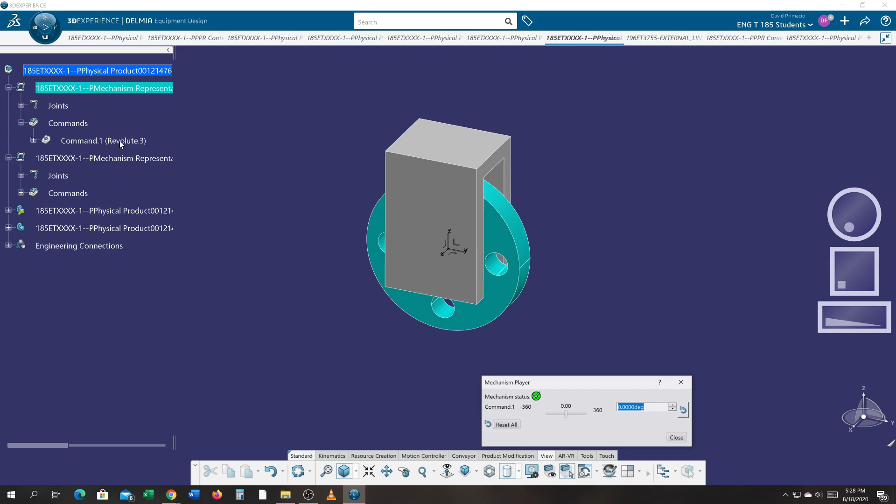I don't know what's wrong with my system now. It was working this whole time. You see my wheel spinning there? I'm verifying that it actually works. But for some reason, when I hit play, it's not letting me play. It's like not even going into the player.

This was a prismatic motor, so that part would move back and forth. I hit play and it should be moving. It's not going into the player down below. Oh, because I'm in Delmia equipment.

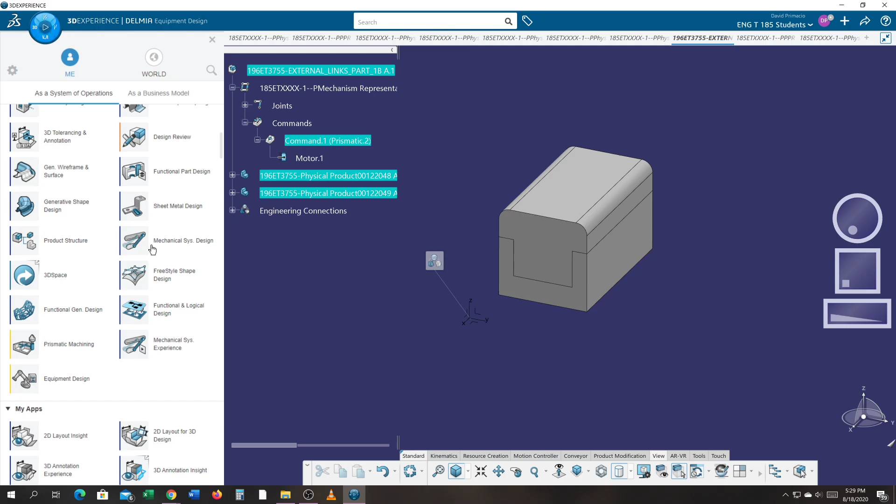I have to go to mechanical system design. And we'll hit play now. So there's a prismatic move.

I didn't put any limits on this because the parts we have in class literally just come apart. So I could just slide this thing where it comes all the way off. Exit will take me back. I can hit play. That's the compass up in the top, the play button.

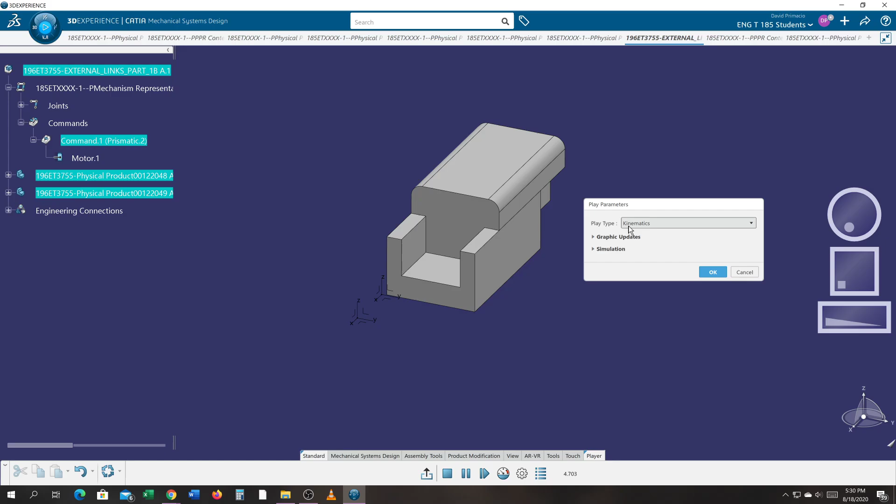I have a settings here. I'm doing the kinematics, and I can increase the frames, and it'll kick it up a little faster, so you can see the part coming apart here.

Let's see. See if I get this one to work. So I got that wheel you made. We're gonna make a kinematic for this so it can spin like that.

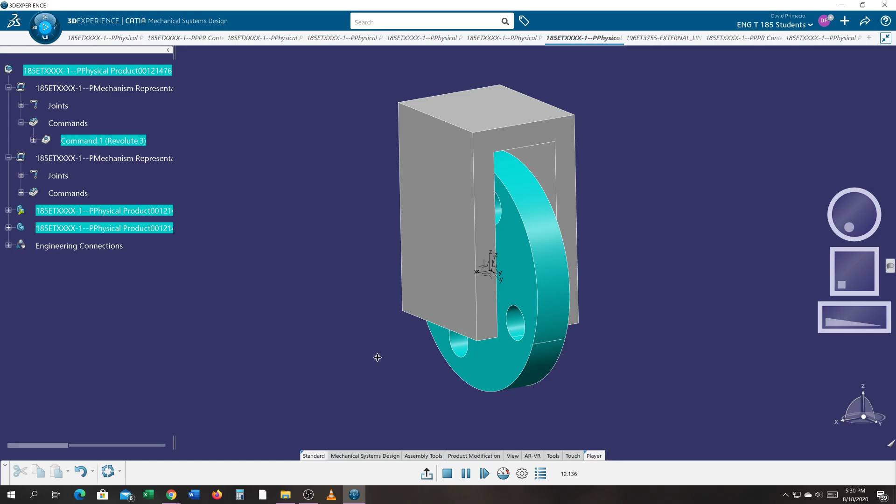There's only a few steps to make it happen, but memorizing the few steps that make it happen drive me crazy. It's nothing like it was before.

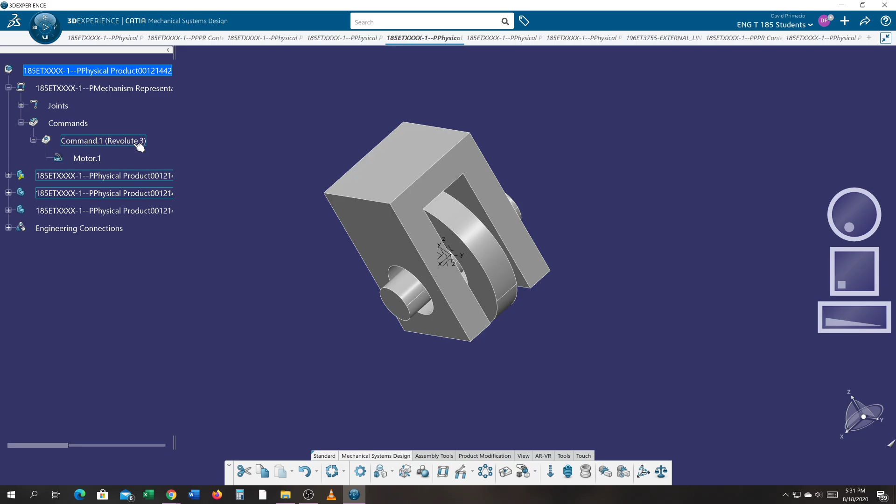So I've been trying this a few times to make sure I can get it to work, but the last time I tried to get it to work, all of a sudden I couldn't get it working right.

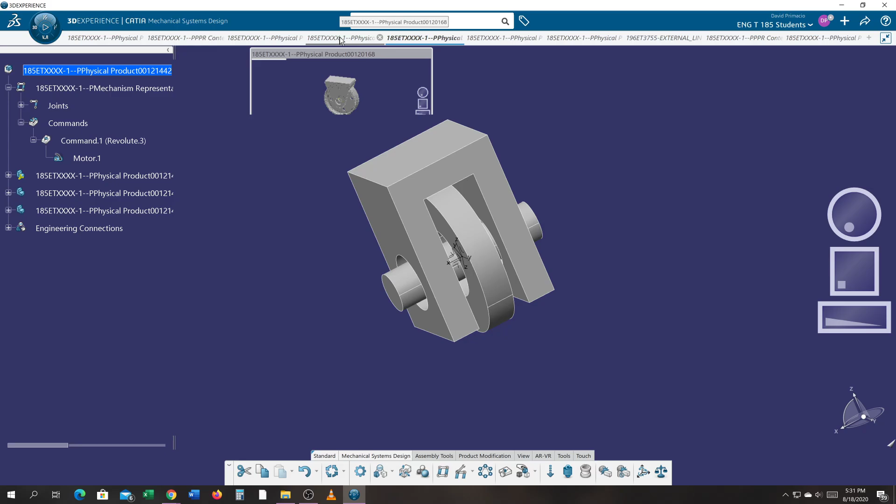See if I have that example. That one, that one. Alright, I'm going to try and run through this step by step.

The two workbenches we're going to use is equipment design and mechanical systems. I don't know why they made this so difficult, but don't confuse this mechanical system design with a mechanical system experience. You want to be in mechanical systems, and what we do is we lock up all our degrees of freedom in the mechanical systems, and the equipment design is where we actually define the motion.

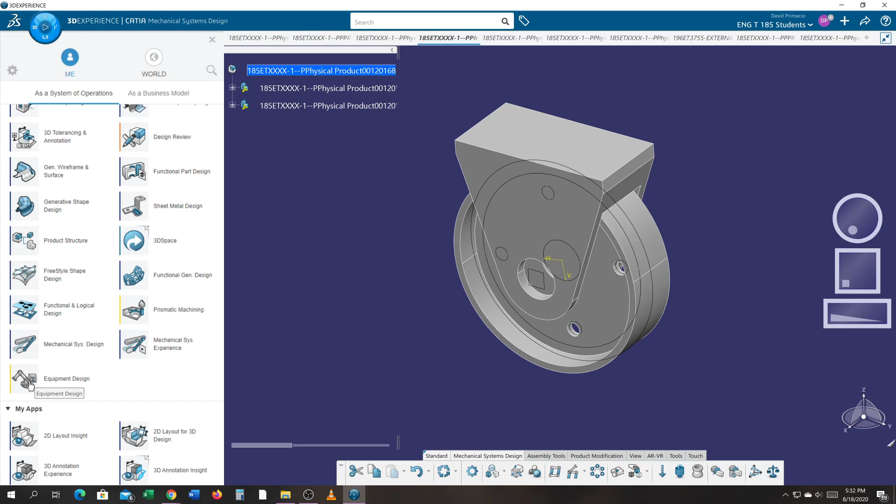So I'm going to go to mechanical systems design. Oh shoot, I was already in there. I saw another model in here I don't need.

Alright, I'm going to go ahead and give this a shot. I'm in Mechanical System Design Workbench up here in the top. I'm going to go to Engineering Connections to set everything.

Now under here, I would think I would want to do my fix and grab the top piece so it won't move. But that always screws me up. I don't know what's going on in here that I don't get that to work right, so I'm just going to cancel out of that.

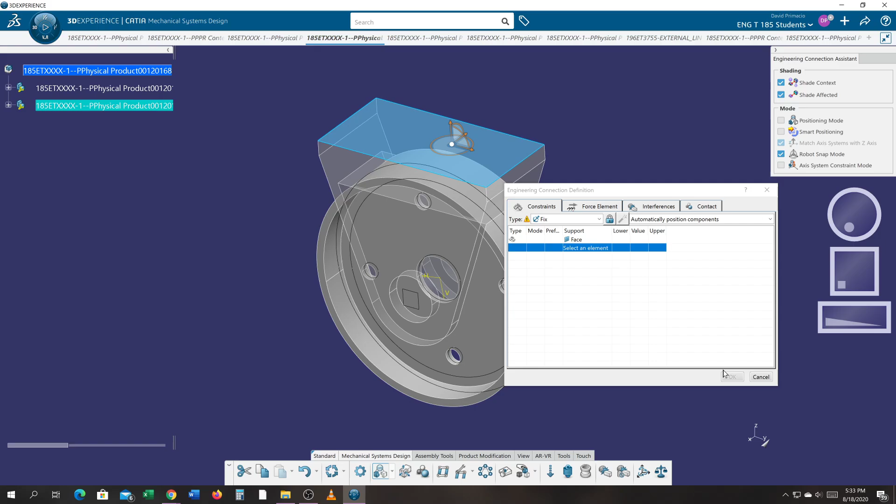Click on the top and use the anchor like we did in the assembly modes. So I'm going to go ahead and fix that.

Now the number one mistake I see people make is that face is highlighted and I go into that engineering connection and it's working on that face now, and I don't want that. So make sure to click off the part so that's not on when you go into the engineering connections.

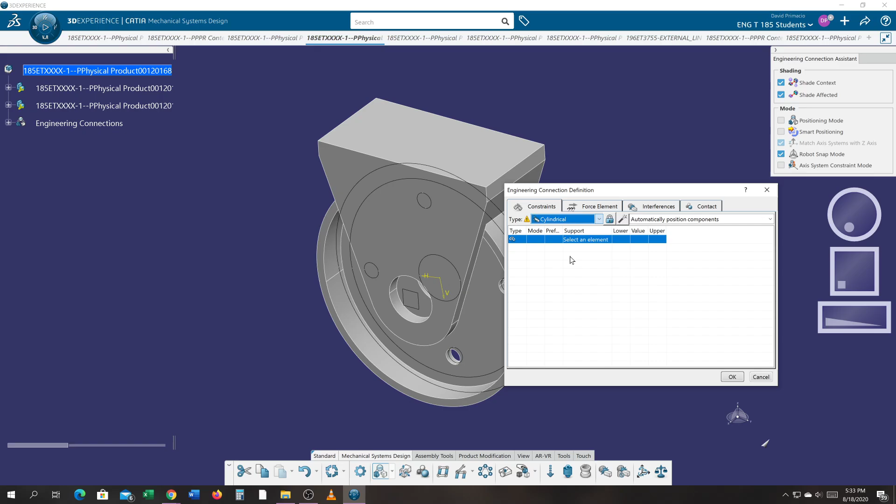In the engineering connection, I'm going to define cylinder, and order of selection might matter, but I think I've tried both and I've been having issues. So I'm going to just grab the outside cylinder of this.

It finds the center of that wheel. I'm going to grab the center of this one here, and it gives me two axes that are coincident or concentric to each other. So they share the same axis.

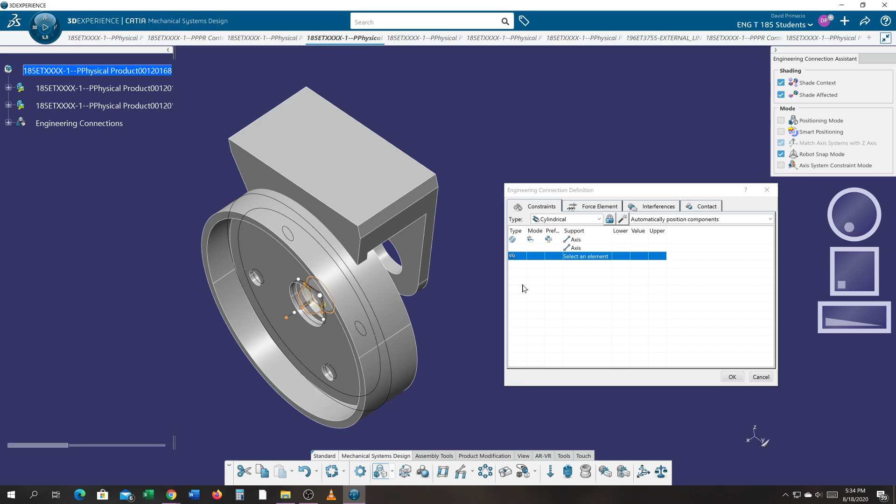Okay. Now I've never had it shift off on me like that, so I'm just going to continue on here. We'll move this over here. Oh, yep. So I got my cylinder set, and I'm going to go into

Prismatic, and I'm going to select this face and this face over here, and they touch. But I don't really want them to touch.

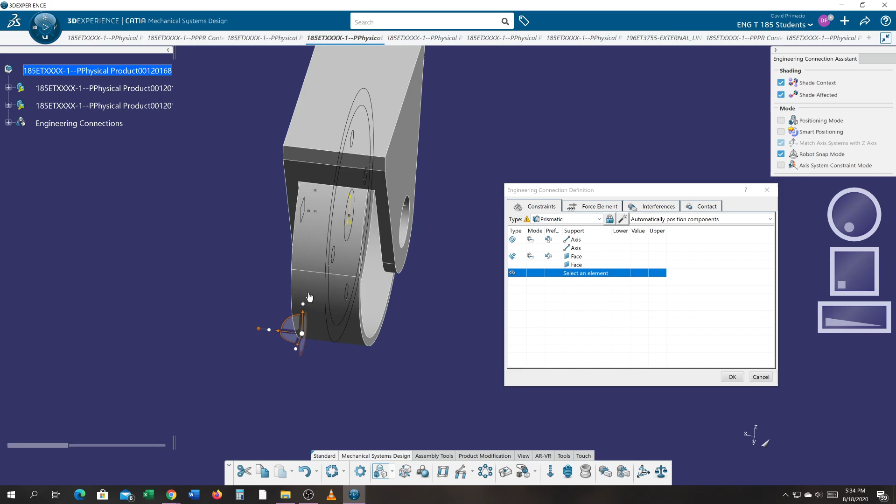Okay, so I was under Prismatic here. I just hit the undo button because I wanted to re-show that. I'm going to have to start from scratch. Remember, nothing's active. Hit this.

And the first thing you want to define is cylindrical. So I'm going to get the two holes to line up, so that's why I'm using cylindrical. I'm going to grab towards the center of this hole and towards the center of this hole, and that should line those two axes up to maintain this coincidence.

So I've got coincidence lined up. I've got coincidence on these two axes, which are the two axes for the center of the hole. The next thing I did was a prismatic.

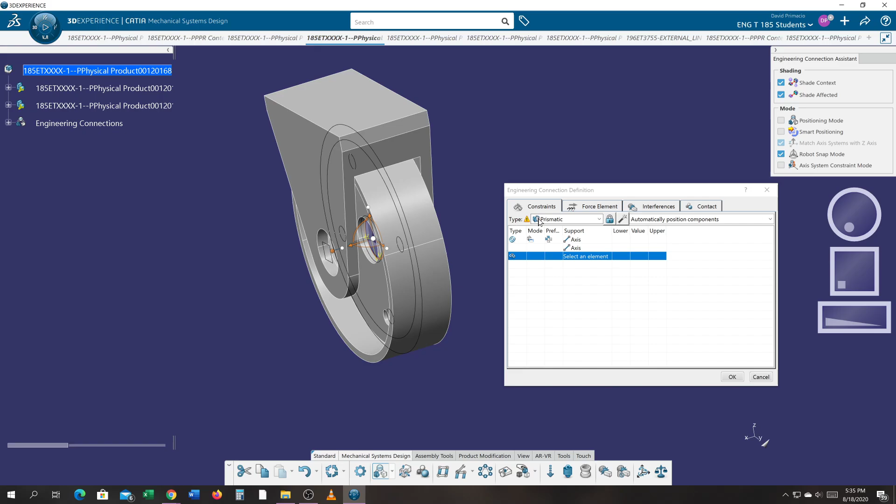Under prismatic, the type I'm doing next, I'm going to grab this face, rotate this around, and grab this face over here. For some reason it puts them so they're touching, in contact, and that's what this is doing right here. So it's got this face and this face. This blue line is waiting for a next line.

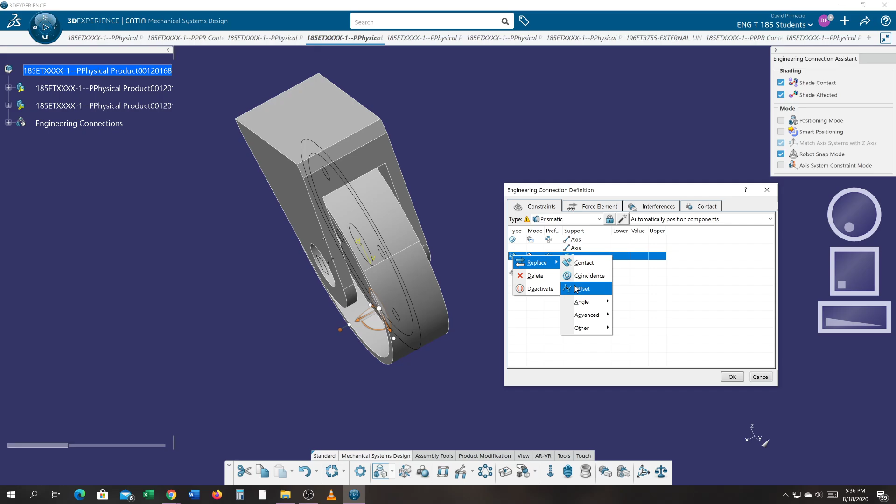I'm going to go back to the face to face I did, and on that one I'm going to right click to do a replace. I don't want to do a face to face. I want to create an offset so that wheel is centered and not touching the face.

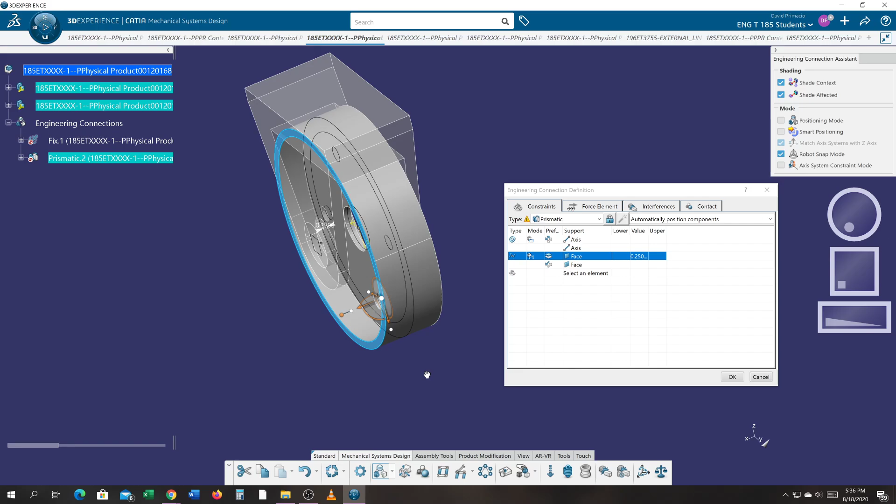Now I happen to remember, oh I guess it didn't because I kicked out. I'm going to change this to 1/4 inch because that's how I created this part to be centered, 1/4 inch gap on both sides. What I've done so far in my engineering connections in the specification tree is I've fixed

the top piece so it can't move. At least that's what I am hoping I did. And then I set up the axes so that there's a cylindrical concentricity between the holes. And then I went face to face to set the offset. Where in this wheel is it going to sit? Now what I want is that wheel to spin.

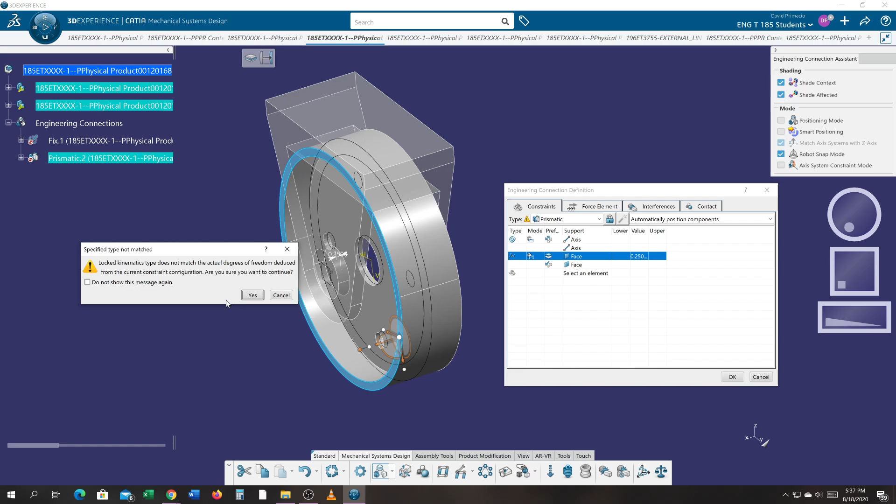This mode again, under mechanical systems, just locks everything down. I have to say okay, and just ignore this message. Yes, I'm sure I want to continue because you're making me go somewhere else to continue this. So I say yes, I'm going to continue, but I have to switch workbenches. In the old days you only stayed in one workbench, and the workbench was called Kinematic.

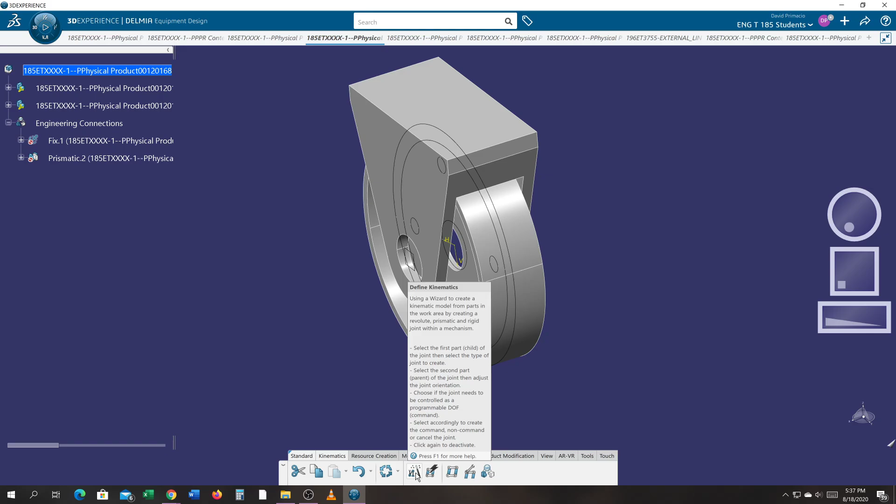Now Kinematics is found in equipment design. I'm not really sure how you would know that if I didn't tell you. But here's the tool, Kinematic, and the feature I'm going to use is called Define Kinematics. So I'm going to define what motion I want, and the motion I want is the wheel to revolve.

So you select on that and you wait for a pop-up window to come up, and no pop-up window will ever come up. It used to have text in the bottom left corner telling you to pick something. It doesn't tell you now. You just have to know. I don't know why, but you just have to know what to pick. I'll pick this wheel, and then it gives you your options.

So to me this seems a little backwards. Seems like this should come up and I tell it what I want to do, and then I go pick what I want. But you don't. There's no pop-up window, nothing telling you. You just got to know to pick the wheel. You're going to hit this revolution because I want to do a revolution around the cylinder.

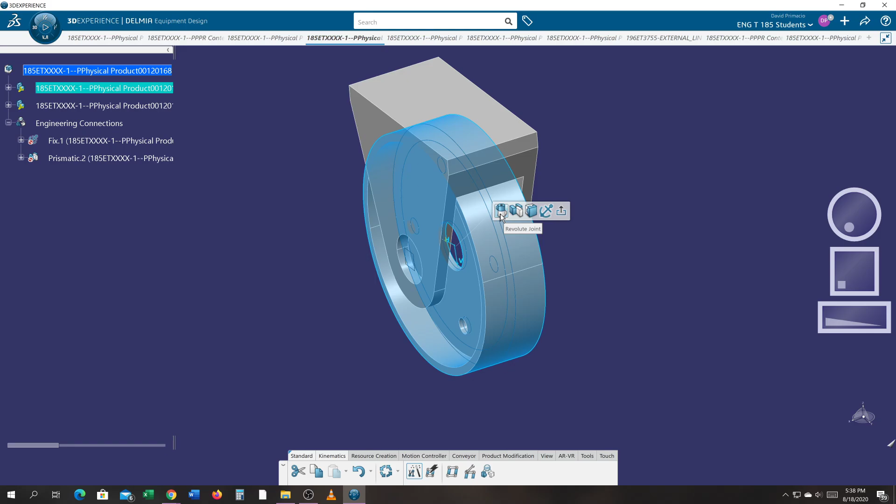You have prismatic, that's how I did the other piece, and then rigid, and then anchors. So I'm going to go ahead and hit this, and it seems like I should be able to just say okay and take what it's got, but it doesn't. It's going to make me define something, and I found the easiest way to define the axis of revolution is to pick this orange circle with the 3 orange dots.

So I pick this define plane, and 3 points will define a plane. I'm going to pick 3 points that lie on the circle to define a plane that sets the axis to go perpendicular to. Which seems like I shouldn't have to do that, but that's what you got to do as far as I can tell.

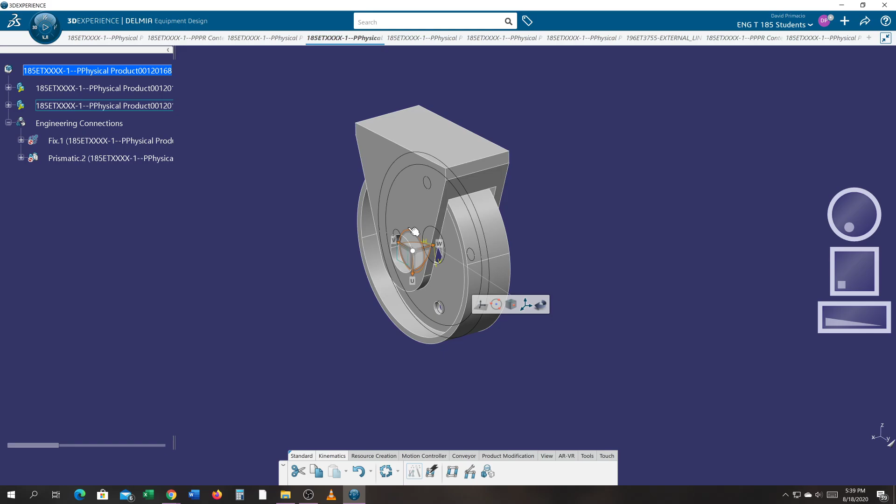So I'm going to click multiple points on that curve, anywhere on that curve. They literally could be side by side, but you just got to get that edge and see where that green dot comes in. When that green dot shows up, it'll allow you to set that axis. Now here again, I'm sitting here waiting for it to do something, and it's waiting for me to do something.

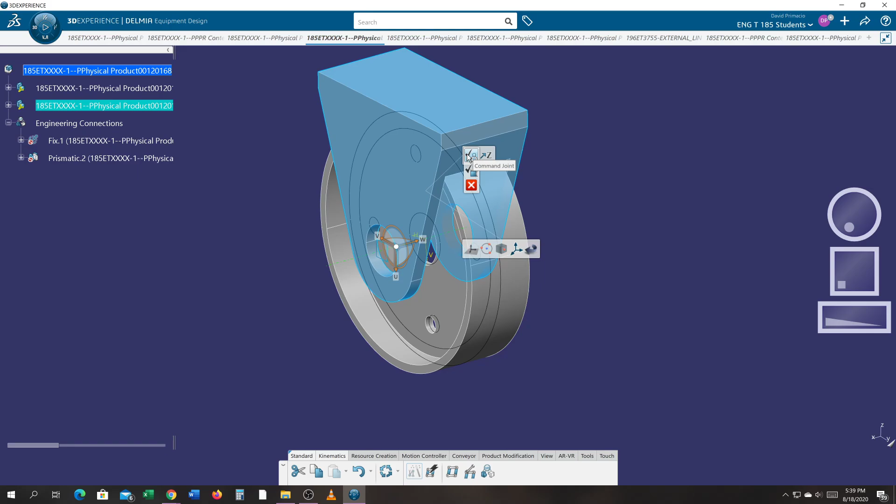Again, back in the old days it would tell you go pick something, like I want to pick this bracket so that it knows I'm going to anchor against a bracket, and yes, that is the bracket I want, so I click that check mark. And after I do that, it creates this mechanism up here in the top of the tree, and in the mechanism you have this joint revolution, which is what I just created.

And that is a command. Okay, so command 1 is revolution. You can get all kinds of revolutions and prismatics going on all at once, like if you had a pump or pulleys or something like that, pistons going in and out. That's the feature you'd use to set that up.

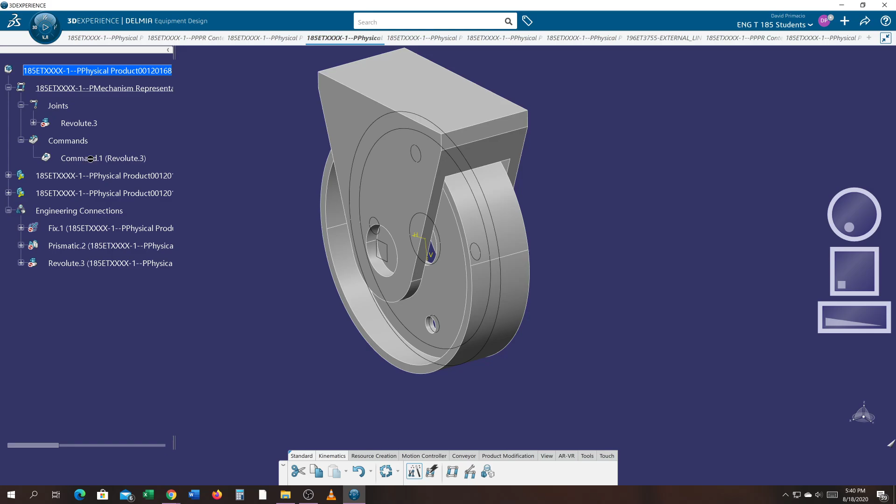Now I want to check the command, but you notice my cursor? It won't let me pick anything. You know why? Because it still thinks I'm in Define Kinematics. And again, in the old days it would be highlighted, bright, easy to tell. This is still on, Define Kinematics is still active. I'm trying to go to my next command because I'm done setting commands. I only wanted that one revolution. I wanted to go check that. I can't do it because this is on.

So you got to remember to turn that off so you can come into command and double click. You have a little bar here you can move back and forth, and you see what happened? I got that screwed up. I got the bracket rotating instead of the pulley.

The concept will still work the same. I'm going to close that, and do a right click on your command to attach a motor. Now I didn't think that would work from here, but I guess it does. I'm going to attach the motor, and you just leave it as the default. If it doesn't seem to be spinning right, you can try and change your numbers to adjust velocity and time. I'm just going to use a constant speed and hit OK.

After you've done that, you'll see there's a motor in there. You won't be able to run the kinematic until you have the motor set.

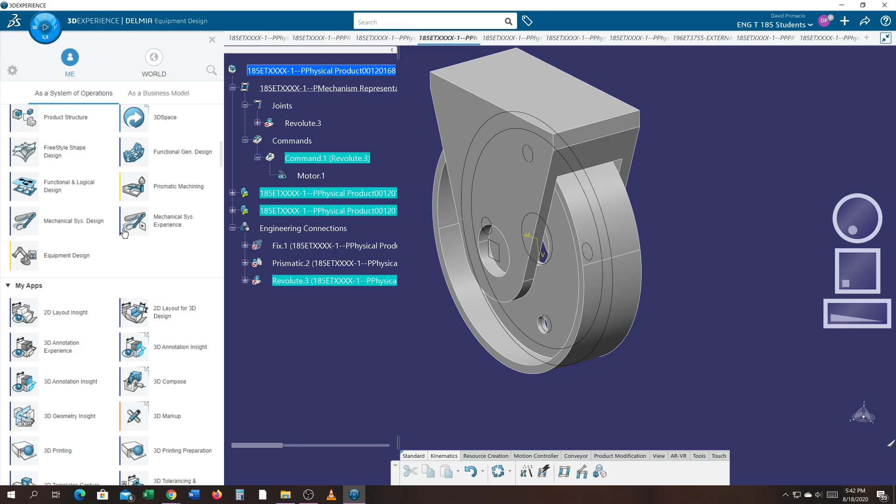So I'm going to hit play, and nothing happens. And then you think, oh man, I didn't do something right. Yeah, you didn't do something right. You didn't leave Delmia Equipment Design. It's the one place this doesn't work. It's goofy to me why we even have to exit, so don't ask me. I'm just telling you, you got to go into Mechanical Design. Whoops, too far. We got to go back to that Mechanical Systems Design, not Mechanical Systems Experience.

With the command active, you can hit play, and in this case you see my pulley here rotating. So we're going to make some adjustment here - or not the pulley, the bracket's rotating.

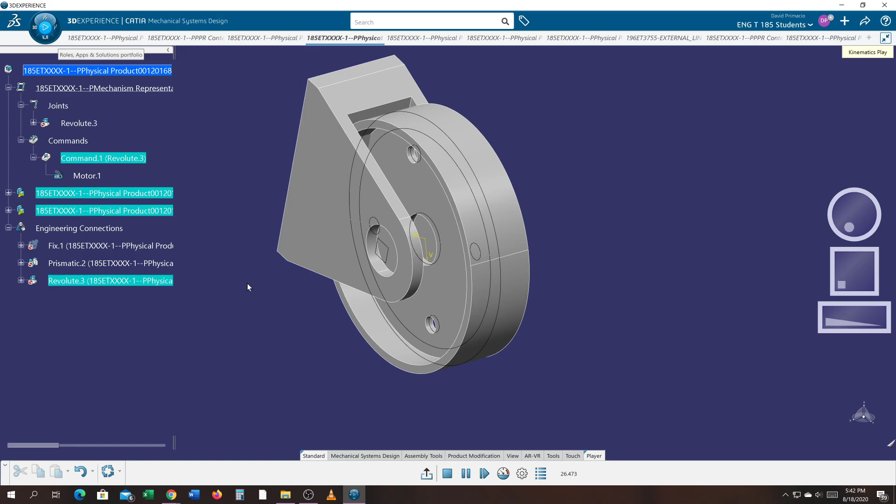Alright, so that's going to be this video for now, just to show you how to apply and set up a kinematic. I'll do one more kinematic, and then I'm going to show you a trick on how I built the wheel and the bracket. So that's going to conclude.

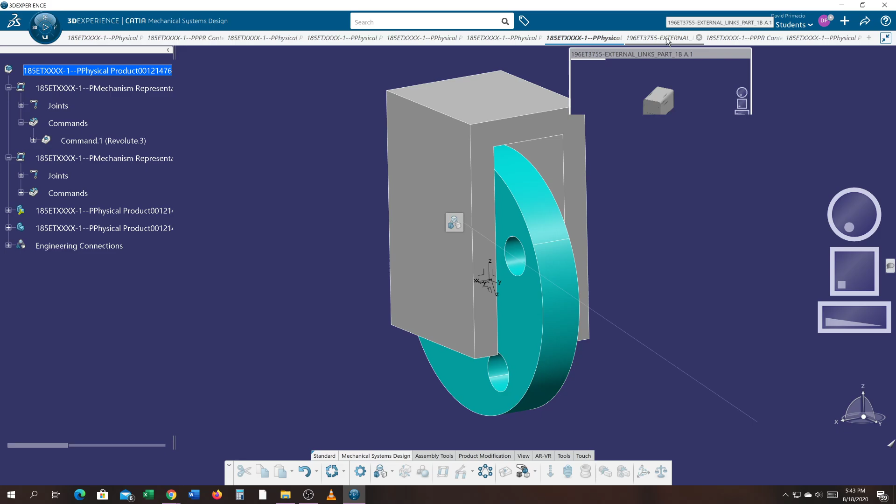Actually, you know what, I think the other one will be pretty quick. So let me go and exit out of this. Well, if I can find it. No. Yeah, that's it right there.

Okay, again, I've already got this defined. And we can set limits, how far back I want it to go in the negative X direction, and how far forward I want it to go in the positive X direction, and then let it slide back and forth and back and forth. But I'm just going to show you this one motion for now.

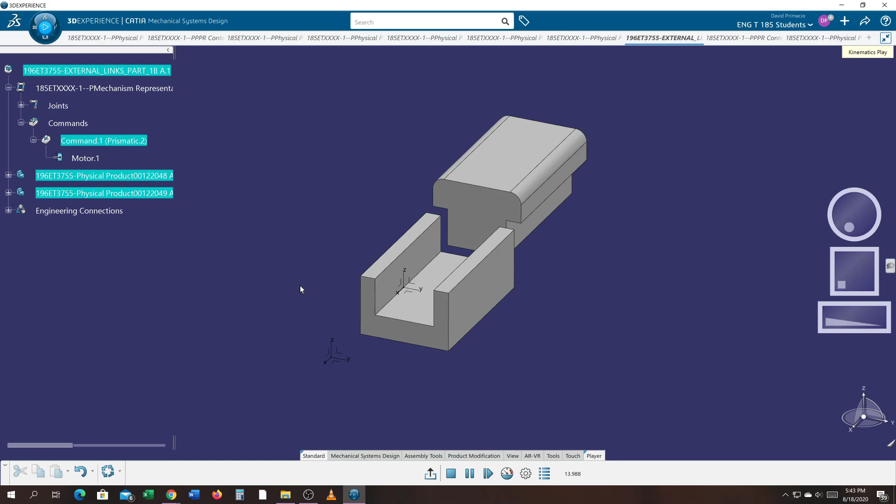So if you're having problems, and believe me you'll probably do this a lot, you might just delete your parameters that you've created and then recreate them. You'll actually have to delete that joint as well. So what you got to do is select the top mechanism, and that will delete everything in the mechanism. So I just have this part and this part in an assembly.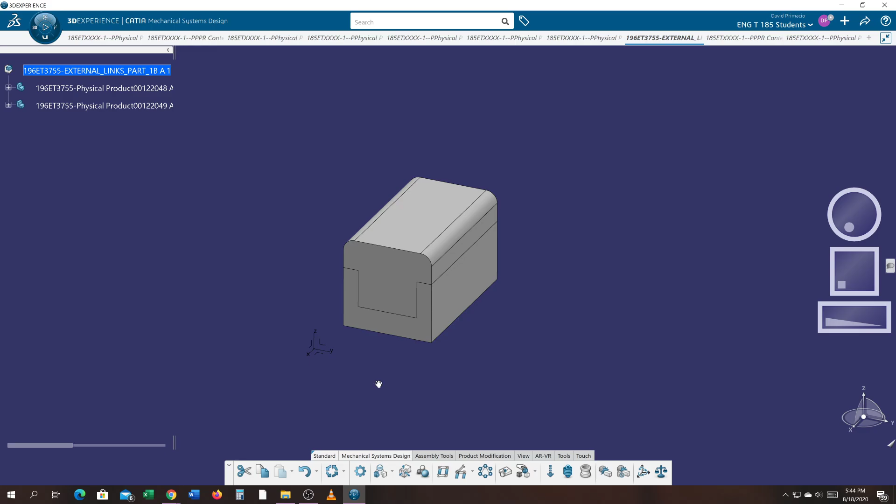Now, instead of using engineering connection, you literally could do it like you're doing an assembly. If I click on this and hit fix, that should lock the bottom piece. Now I really don't have anything else to lock, because all I got is this thing sliding.

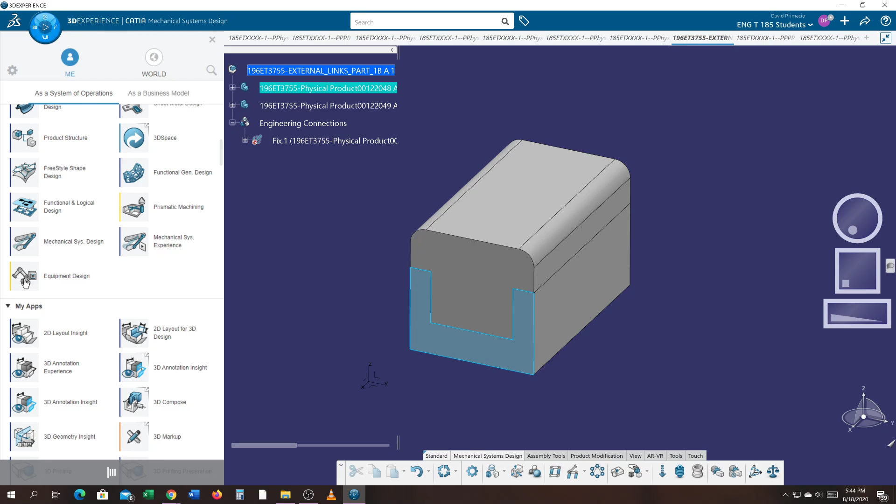So I'm going to go to 3D. Come on. Equipment design. Activate define kinematics.

You're waiting for it to do something, and it's waiting for you, and it will always win. So you have to pick something here. I'm going to pick this part, and I want it to slide. So I'm going to use a prismatic joint, and oh, how did I do that?

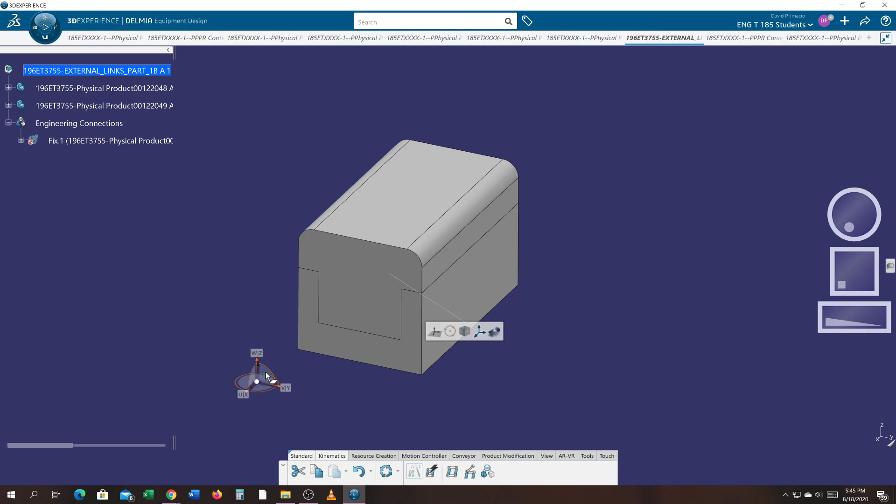I'm going to try and define the plane again. So that should set up which direction to go. And I got to pick this piece that I'm anchoring and check that. Now if the other piece moves, that means I did it in the wrong order.

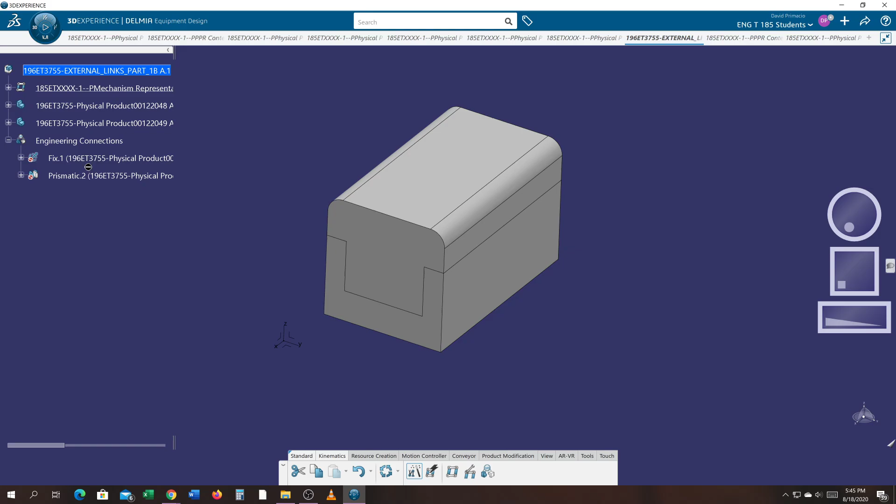I come up here, I see that it created a command. And again, why can't I pick this? Because it still thinks kinematics is on for some reason. So I'm going to turn it off. Why? I mean, I suppose it's because you probably want to create more kinematics, but with no pop-up window coming up, it just seems confusing.

I'm going to create the motor, so I right-click, attach a motor. I'll just use their standard, whatever they came up with, and I'll hit play, and it won't play because it's actually playing the visualization of the windows. It can't play the command until you leave equipment design. So I go to 3D, and I go back to mechanical system design.

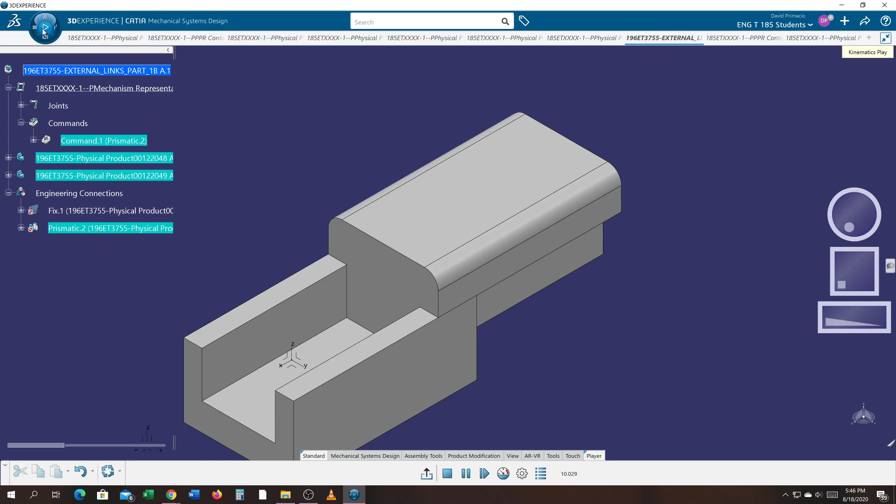Click on this, and I hit play. Okay, so you'd have to do the opposite order of what I did if you wanted the other piece to move. But it's confusing to me because I fixed it in the first place, so to me it doesn't seem like it matters what order I pick, because I decided that I wanted the bottom piece to be fixed, but it decided to do this instead.

Alright, so you guys worked on some parts similar to this. You can have some fun here mimicking the kinematic features. I'm going to do another demo on how I created the pulley and the bracket.